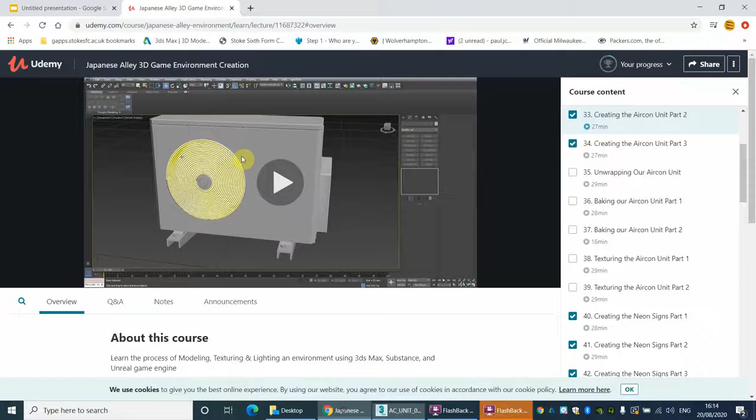Okay, so we're now going to work on this. We're going to make a circular, kind of spiral grill over the top rather than the square one here. I think it'll look better.

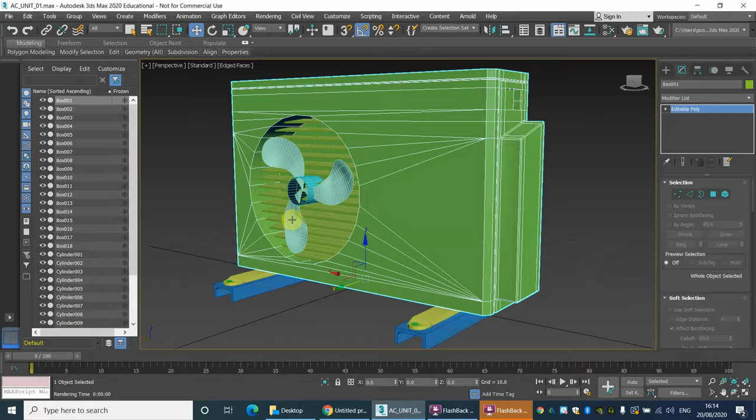Okay, so at the moment I'm just looking at where the blades are. They're quite tight to the end here, so I think I could move the grill, the blades, and the center column backwards slightly.

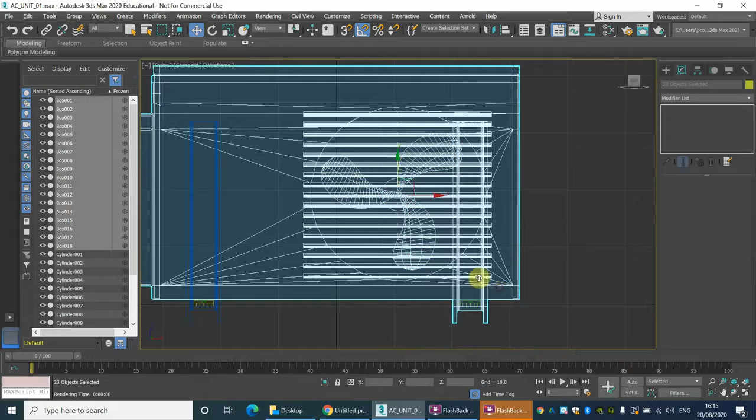So what I'm going to do is, yours might not be as bad as mine, but if it is, you can select, and then with the Alt key just select the parts you don't need, and then we can move those back.

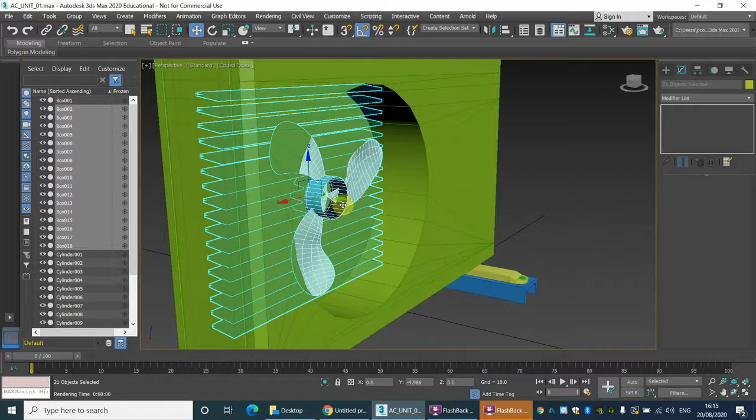Let's have a look at the perspective view so we're not losing any. They were quite far out before, they were like this, so we just want to go inside, something like that, just so you've got a little bit of space. Let's move them out a bit more, just a touch. Now we've got some space for the grill.

Okay, so I'm just going to quickly save that.

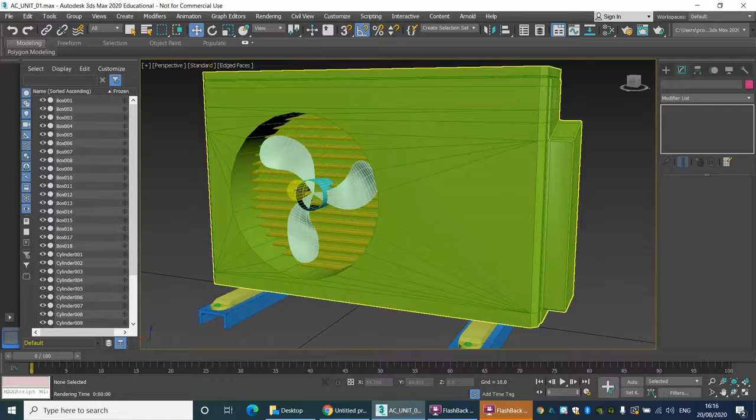So if you're using your Alt key to rotate and you can't really focus on the object, the best thing to do is click on the actual object itself, and then when you rotate it you've got full focus on that area. Okay, so let's have a little look at this grill.

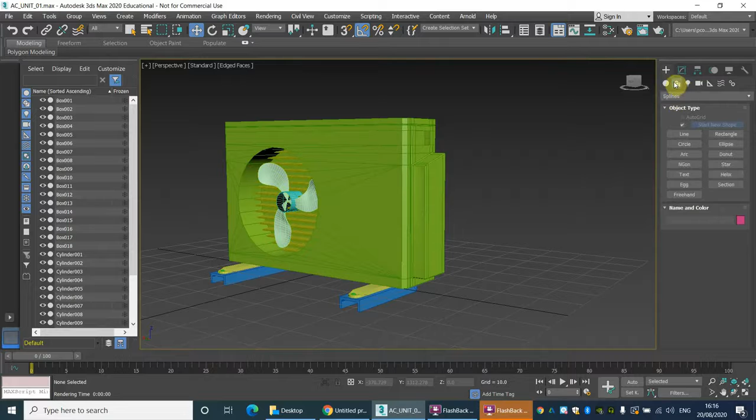So what I'm going to do is create a helix. So we need to go into shapes, splines, and a helix. Now this can be quite tricky to get right, so we'll just have a little go at this.

So I'm going to go out first, and then down, and then across like that. So it's three kind of drags.

Okay, so what I'm going to do now is rotate this 90 degrees so I can see what I'm doing, and place it next to my front view here. So if you've got this icon clicked here, if it isn't selected, select it.

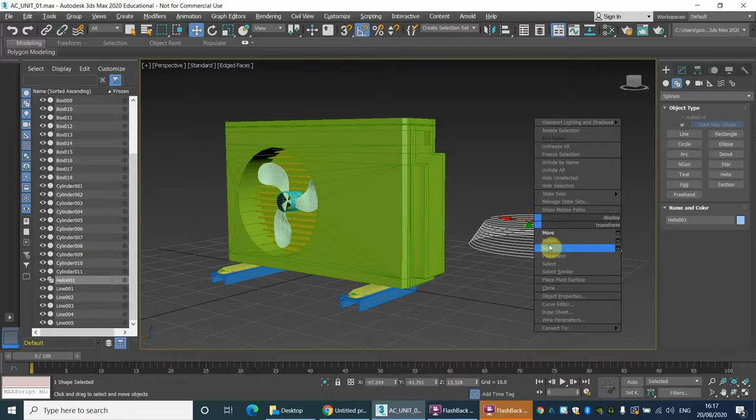If you're ever going to rotate anything 90 degrees, 180, 360, use this angle snap toggle. Then when you rotate an object and hold down your shift key, it will snap to 90 for you. Otherwise you'll be trying to do it manually and it's very tricky.

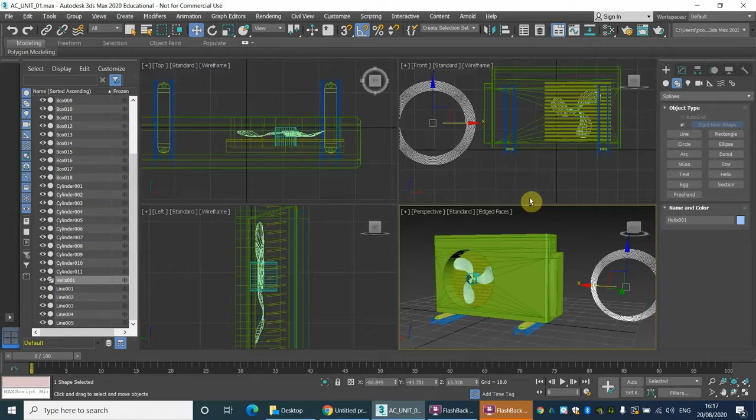Did that move slightly? Let's have another go at that. Let's say 90. Okay, and then I'll go back to move. I'll move it out so we can see it next to. So at the moment you can see it's far too big.

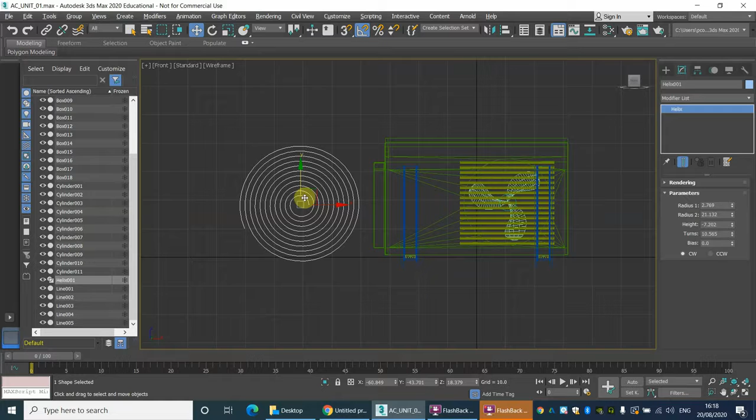So what I'm going to do is, if we go to modify, we can then with the helix do something like this. So with the radius, what you want to do is leave the center section like it is here, just so we can move it around the center section you've got here.

Okay, so we'll do that. So let's go back into the helix. Radius 2, you might need to go back to your perspective view to see this. So radius 2 would be, let's see, we don't want to go any higher than that. The height, it'll go in and out.

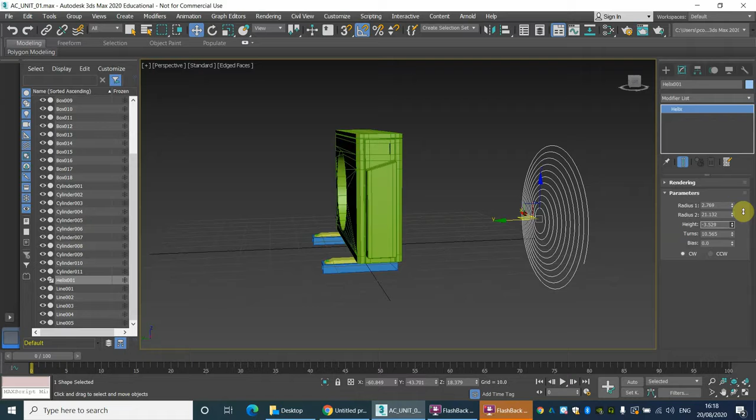So what we could do is, you want to give it a little bit of a convex shape, because you want it to kind of bow slightly there.

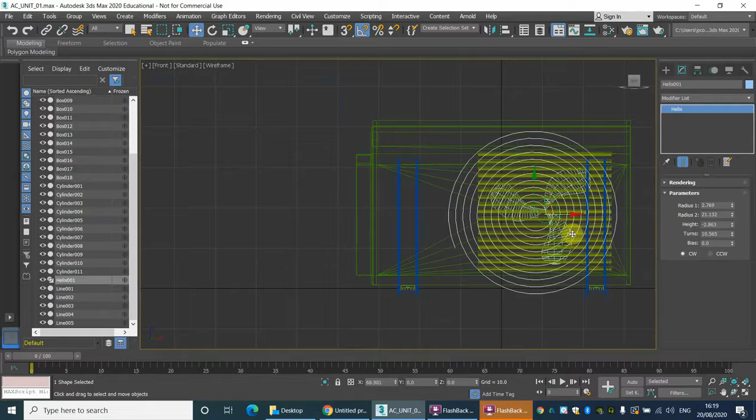So what we'll do now is move it into the area where we're looking at. So obviously you can see that this needs to be reduced somewhat.

Okay, so we need to try and get it in the middle if we can. You can use your center section there to try and position it as best you can around the area itself.

Okay, and then what we can do now is add some more, we can add some turns to it. So we can do some extra turns.

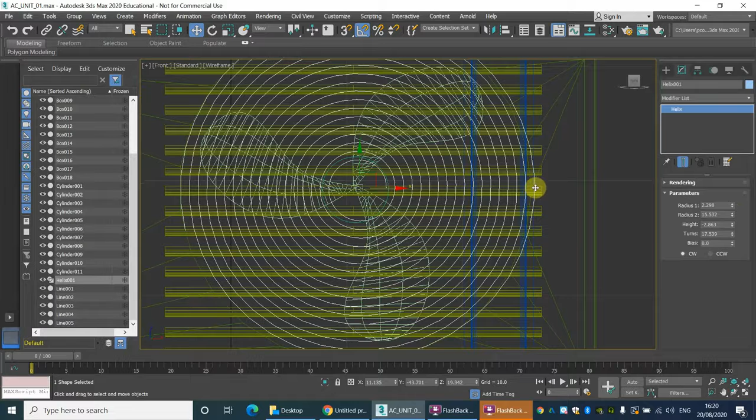We can adjust it, so I'm trying to get this here at the same width or the same area as the outside. You can see this one here is slightly out, so let's just try and get that as best we can in the middle.

And then I'm just going to reduce the first radius, as I say, just like that. So it's very similar to the center temporary column we put in earlier on.

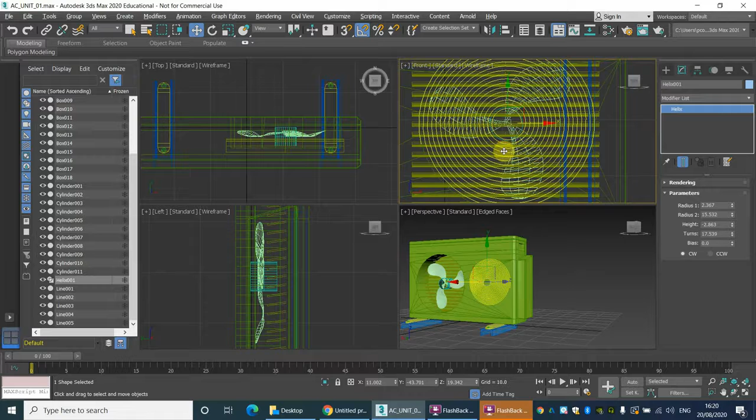Okay, let's just have a look at that now. And... lost it.

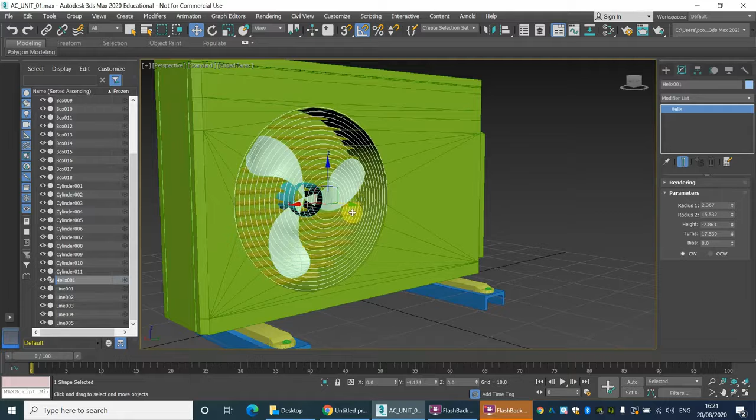Okay, here we go. Okay, so we're getting somewhere. That's not too bad at all. Yeah, that's all right. That's okay.

Now, what I forgot to do is, if we have a look, you can't really see it there, but I want to add a little frame around here. I kind of should have done that first, but not to worry. I'll click on this. We'll leave the helix there for the minute, and we'll come back to that.

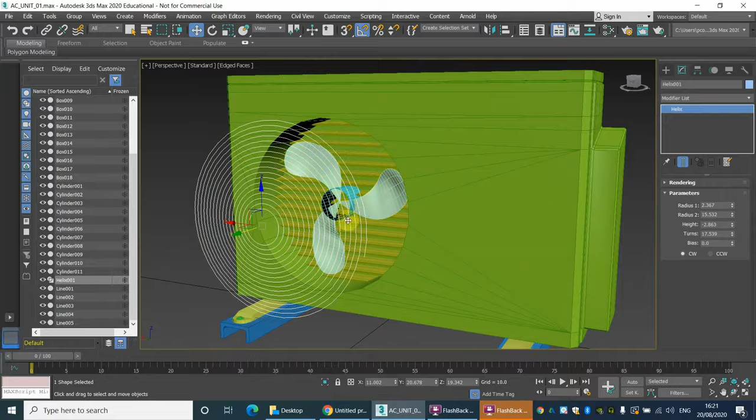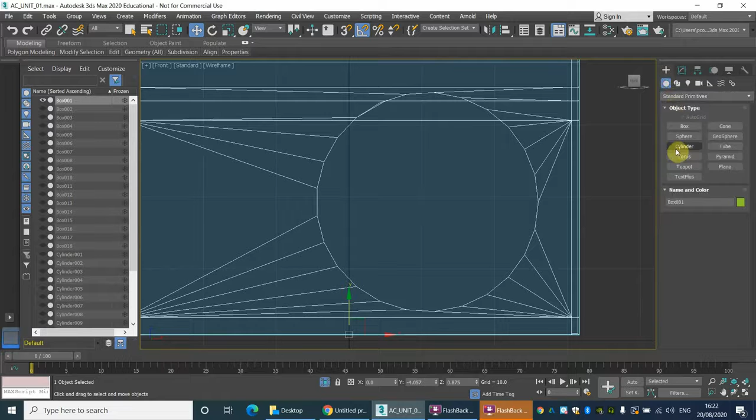Now we've got our shape, radius, size, and turns. We're happy with that. Let's go to the main unit and isolate that. So I'm going to go back to my front view here, create a cylinder from standard primitives, and again, we want to get it as close to this as we can.

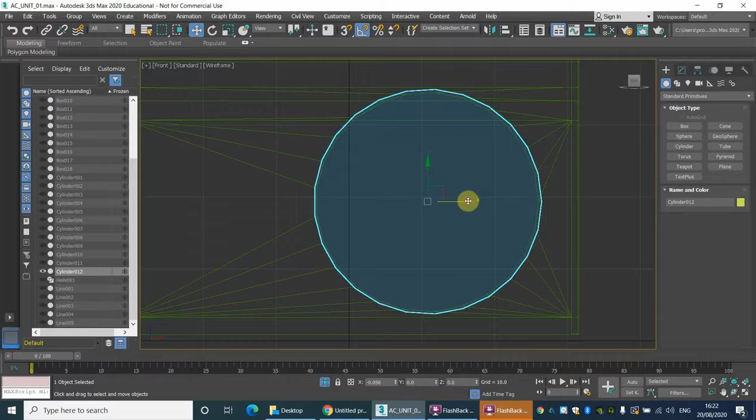Let's just get that so it's matching. A little bit further out though, because obviously we want to create the frame. Let's have a look at this. Move that out. Let's go to modify. Let's just move that back a little bit like so.

Tell you what I'll do, I'll just scale it up a touch and reduce it down later on. Okay, so...

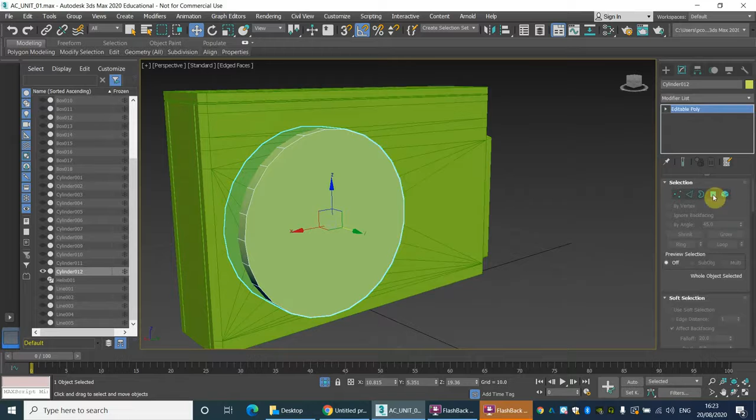What I want to do now is convert this to an editable poly, go onto my faces, and I'm going to click on... what am I going to do here? Let's click on the back face, delete that for a start.

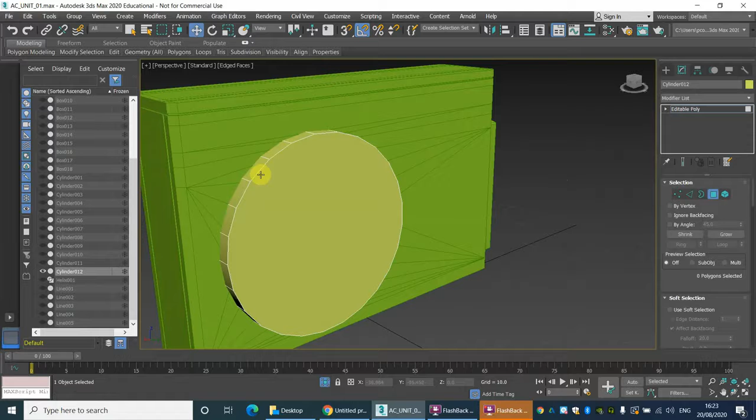And let's go to my pie menu. If you hold your shift key down, select faces... should let you, there we go, you only want, there we go, the faces. So it's a bit tricky, hold down the shift key until it goes kind of reddish, and that saves you clicking on them all individually. You can just select the ones you want.

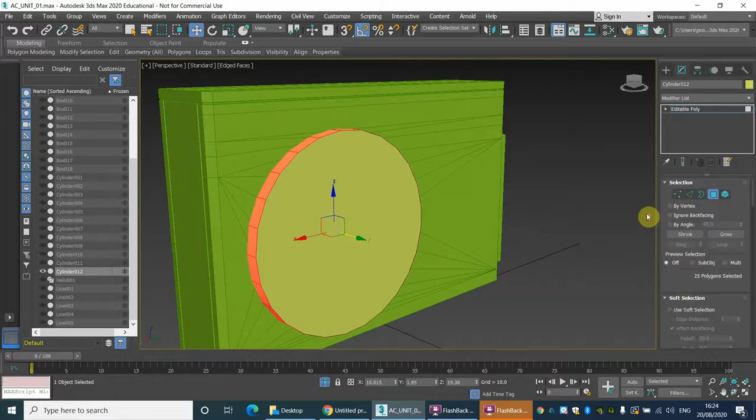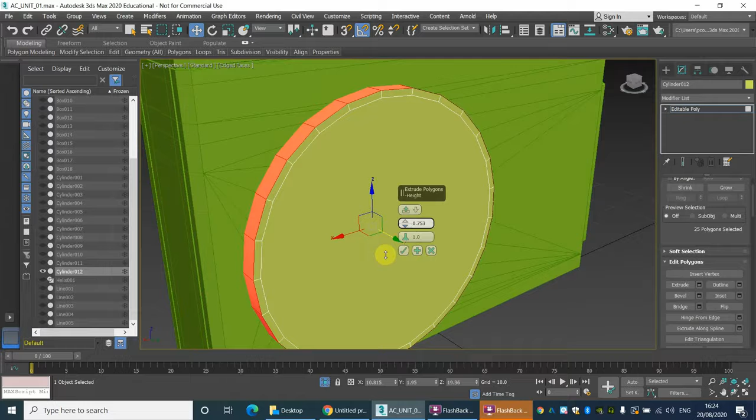Okay, so let's try now, and oh, what's that? Let's try now, and let's give it an extrude, and we'll go to local normal, and we want to just come in slightly. As I say, we can edit this afterwards. So we're just trying to create some extra geometry here for the frame. Okay, I'm quite happy with that.

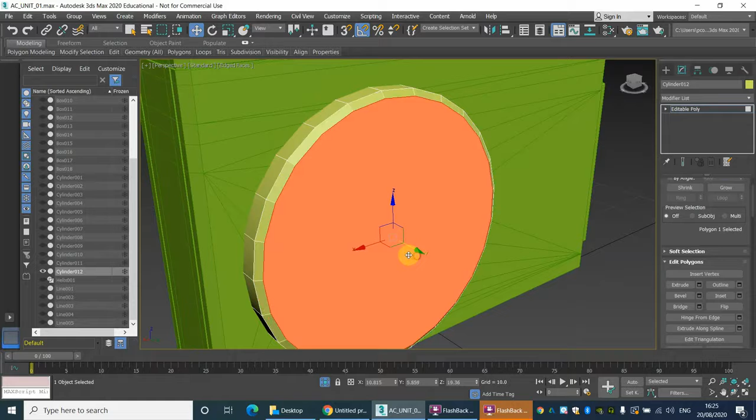And then if I click on that, I can then move that. Oh, what I should have done was extrude that. What I tried to do then was move it back, but obviously it's attached to those. So let's extrude that, and we want to go backwards. Okay, so it's at the back there. It goes behind. Okay. Right. Okay.

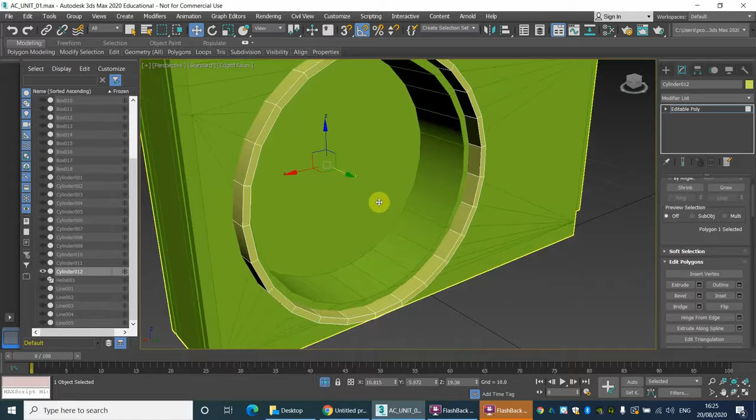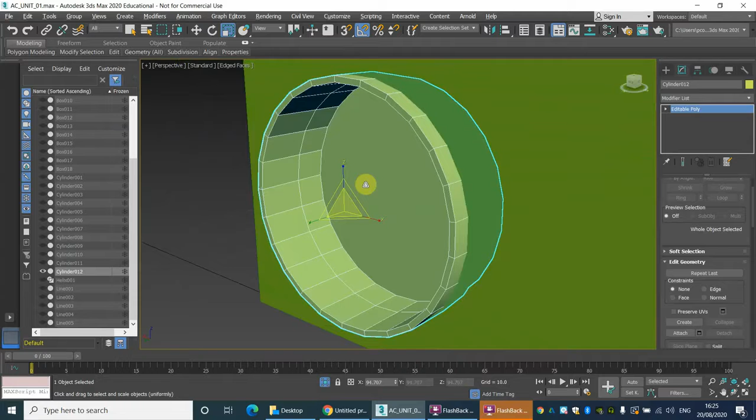So what we can do now is, if we click on the poly itself, we can then just scale this down so we are working like so. Okay, and then we can move it back so it forms a kind of a rim for us here.

Okay, now what I'm going to do is try and chamfer these edges here to try and make them a bit rounder. So if we go to... let's try border select. Again, hold down the shift key. Let's try edge seam. There we go, holding down the shift key.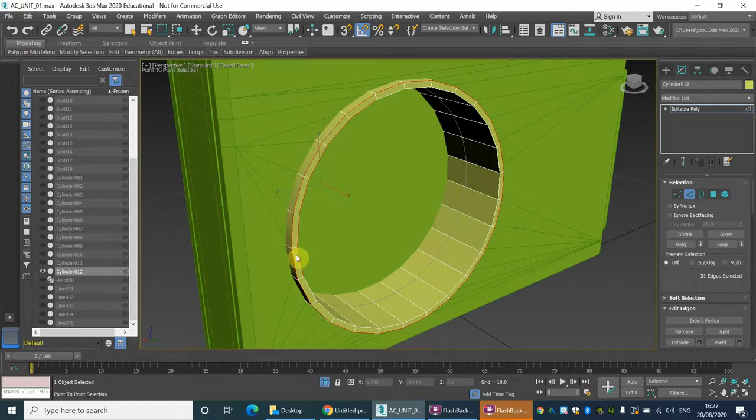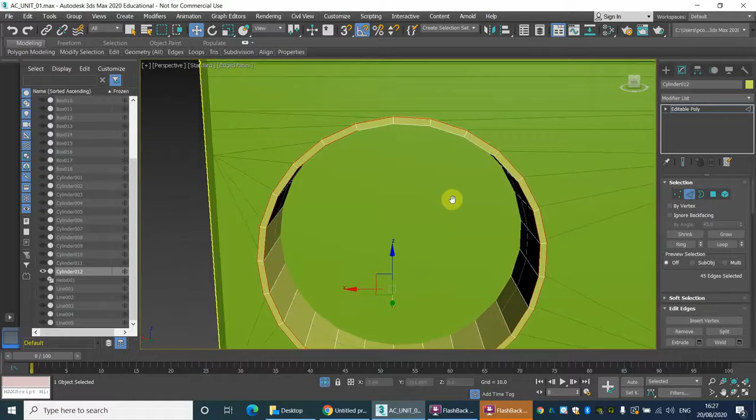Okay, so maybe I'll have to do these individually. Okay, just making sure I've got the edges. So control to add. Maybe get to that one. Okay, I think that's them all done. So then we're going to go to a little chamfer, and we're going to... it's a little tricky.

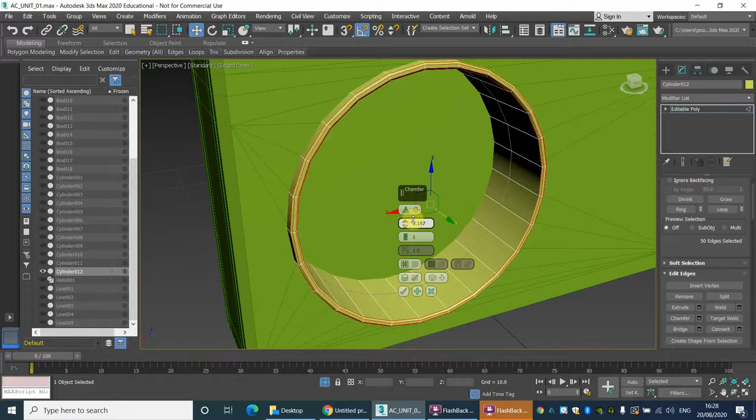Something like that, that's not too bad. It's quite rounded. Okay, and then we'll hit OK. And then if you wanted to, you could move it back.

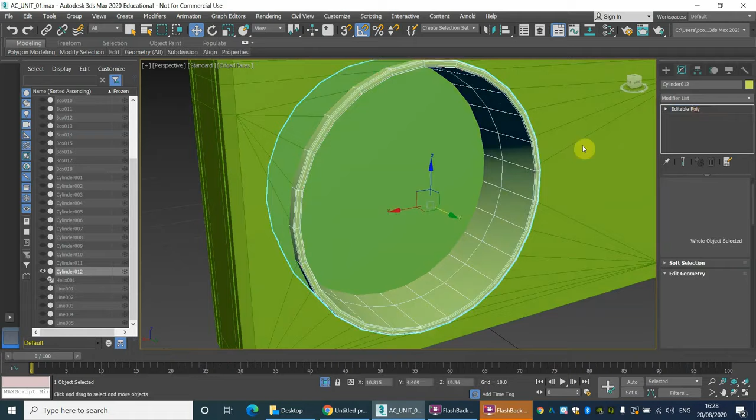So we've got now, if we take off the isolation, let's see if I can isolate two of those. There we go, we've got that. So let's just click on this a minute, and let's isolate that.

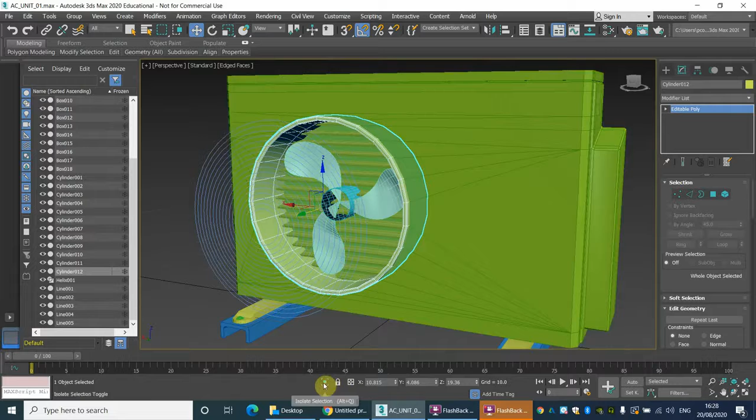Okay, so we've got something like this. So what I want to do is see if we can add a turbo smooth to this. Let's see what it does. Okay, it makes it kind of a bowly shape there. That's not quite what we want.

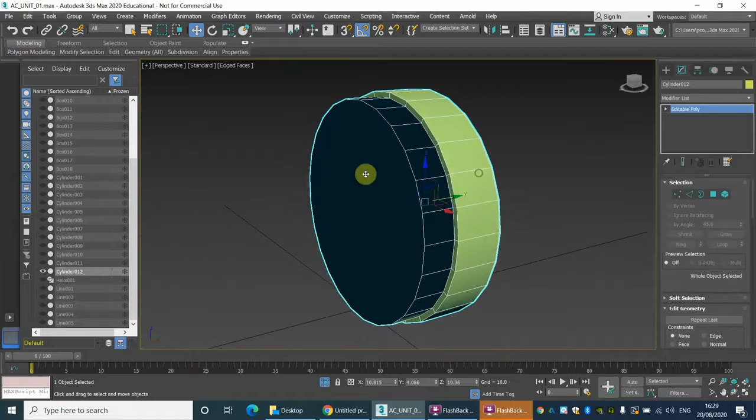So let's just delete that. Let's delete the back. And then let's put a swift loop. Come on. Don't know why this is being such a pain.

Now what I want to do is add one there, one there. Let's add one inside there, and put one here.

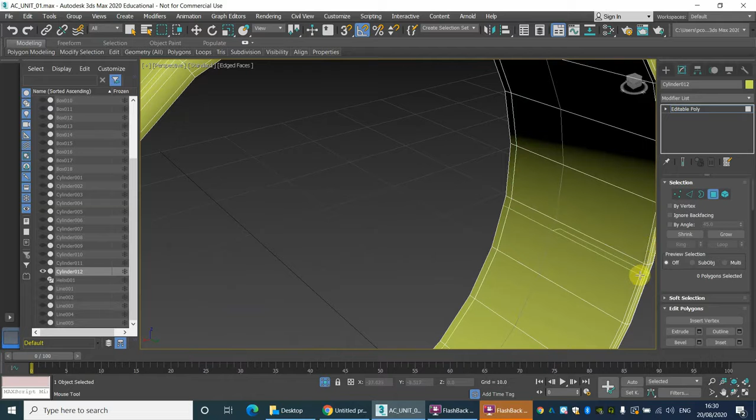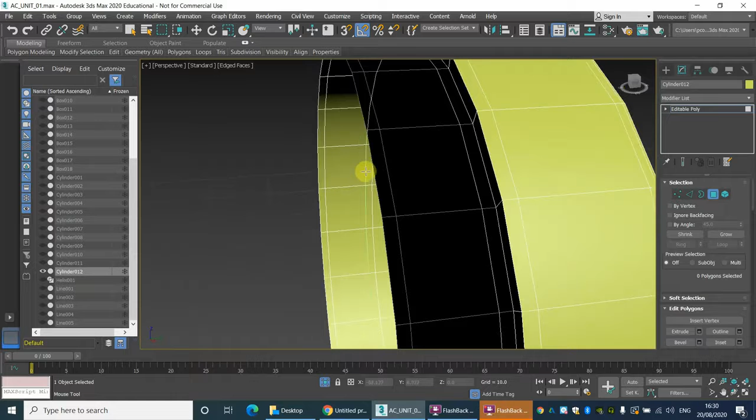The reason we're doing this is we're adding geometry to it. Before, what it was doing was folding it too smooth because it had nothing to work with, so it was taking the geometry and making it far too smooth because there was no additional geometry added into it, like we did with the blades for the air conditioning unit.

Let's put one there for the air conditioning unit. Okay, it's tricky. There we go.

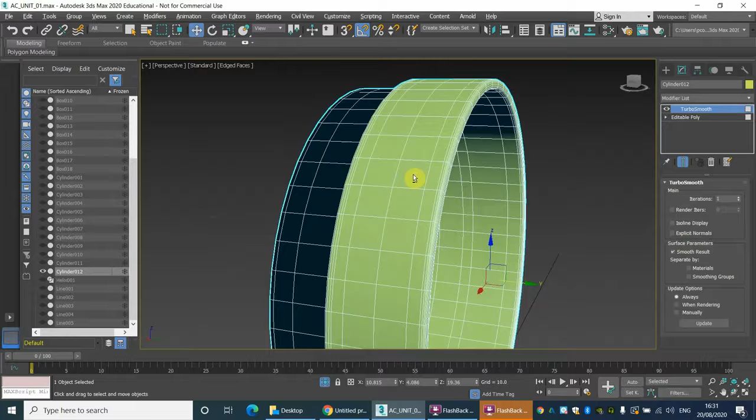Let's just see if this works now with the turbo smooth. That's better now, because obviously, since we added more swift loops into this, as the turbo smooth takes effect, it takes on board the extra geometry. Otherwise it'll just guess if it's not modeled correctly.

And that's quite high poly now. Just a quick little render of that, and that's quite a nice little drum. So I'm quite happy with that. So let's just de-isolate everything, and there you go. It's nice now.

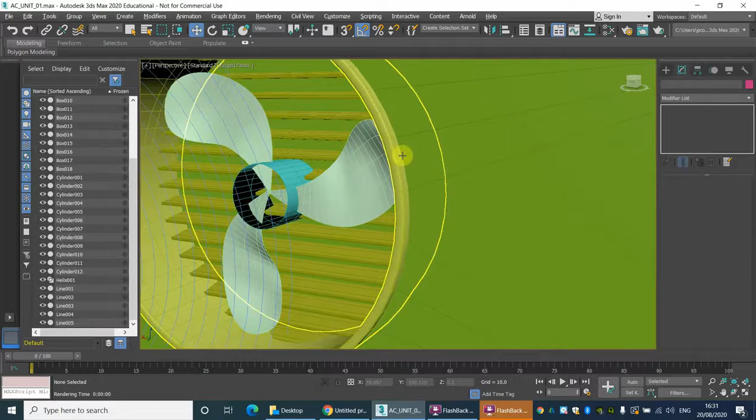So just a reminder, if you are going to add a turbo smooth, you do need to add additional geometry into it, so it knows the parameters of where to smooth and where not to. If you don't add geometry, it'll just do it for you, and it won't be as accurate as you want it, as you've just seen.

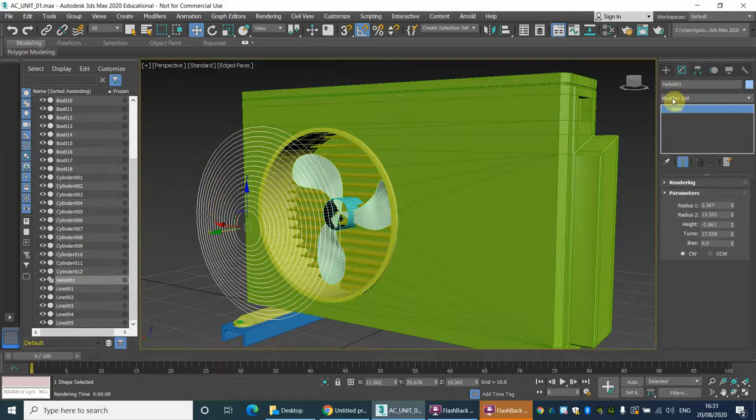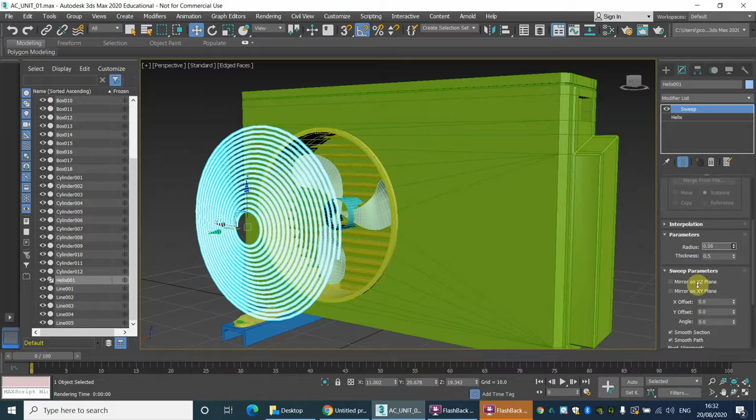So now we've got this, we can now add a swift loop, sorry, sweep modifier, and we want to have a... what do we want? We don't want a tree. Pipe - okay, we'll go for the pipe one. And we will then just reduce the geometry down like so.

Okay, so we can see we've got the helix there. Let's knock that up a little bit more.

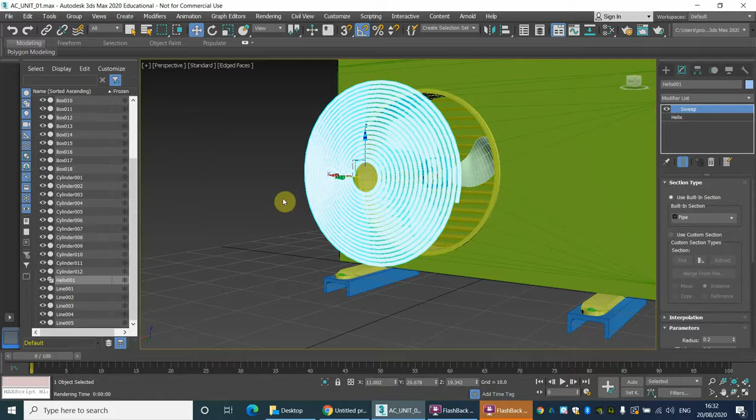Okay, we can do that a bit more. I think let's try 0.2. And then what we'll do is we'll move that back into position.

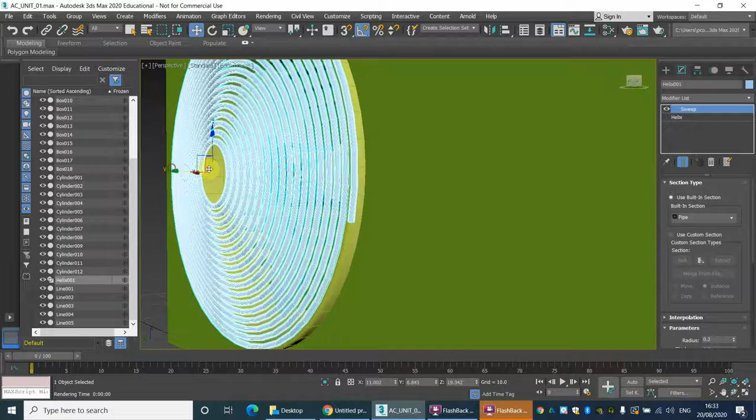Now again, you've got this element here, which is a bit of a pain. So we could either reduce this down, so that's not too bad. It's still okay.

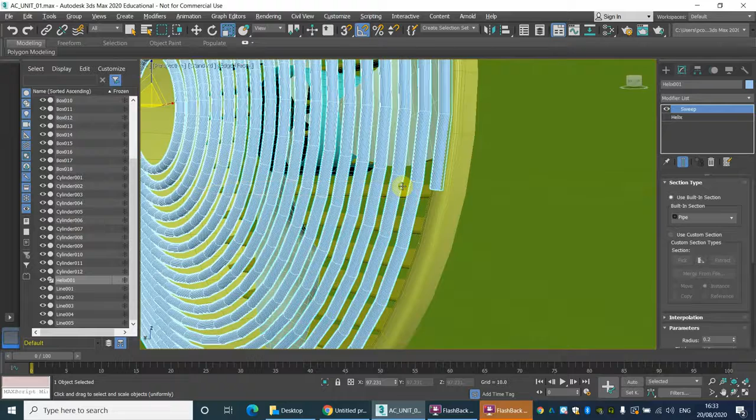Okay, so we've got this little bit here. What can we do here? What can we do here? Now, what we could do is we could kind of leave it like that.

Or if we go to the helix, or if we turn off the swift loop, sorry, and go to our... oh, what have I done here? What I'm after, so I want to go to the helix.

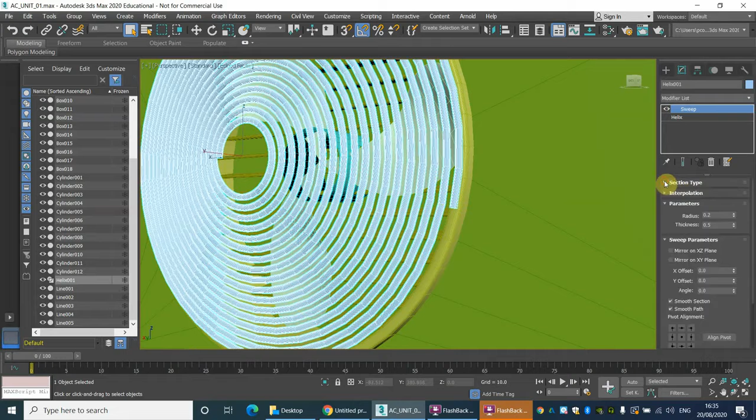And I want to be able to click on these points here. So I'll tell you what I'll do. I will adjust the interpolation. Trying to get hold of the...

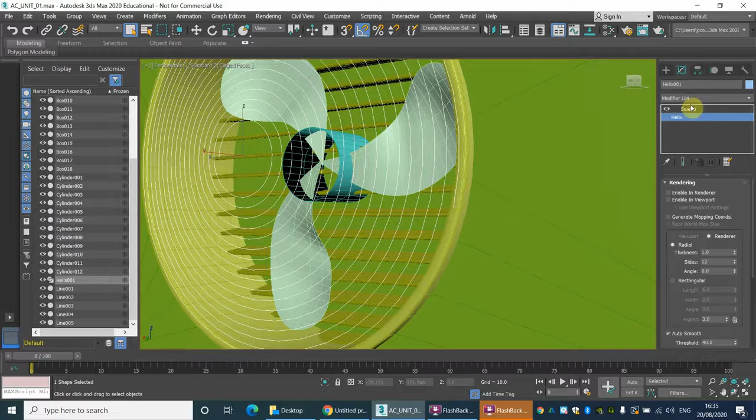Okay, so let's collapse that. And if we go into the vertices, maybe I can grab those and just move them in slightly, just so it's contacting into the frame itself.

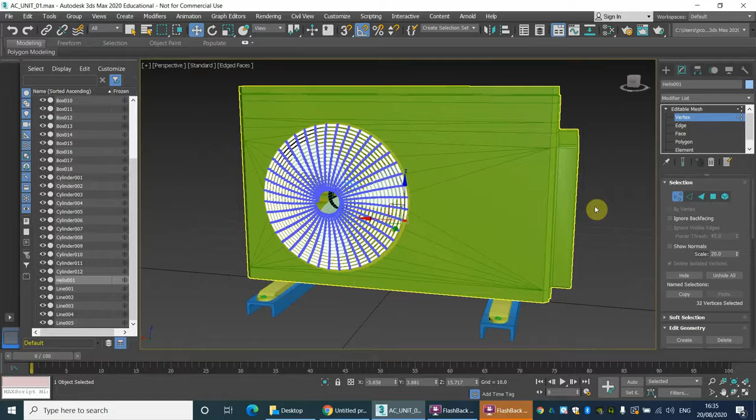Editable mesh, and then we've got something like that. Okay, so you can see it's coming together nicely. You've done the frame around the outside just to give it a bit more detail here, and you've worked on the helix, which is kind of like the grill for the actual unit itself.

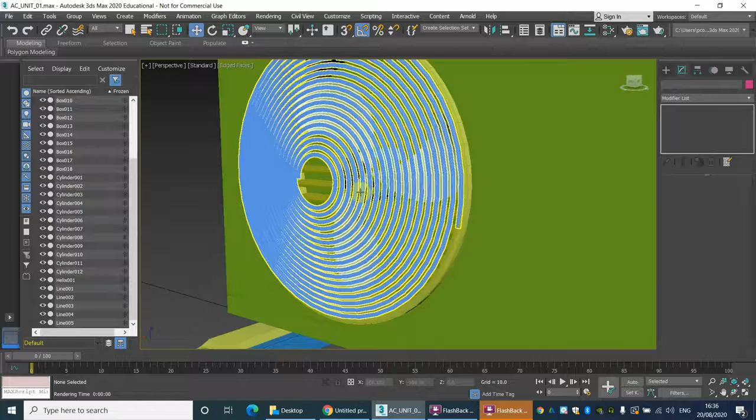Okay, so we'll leave it there for that tutorial. The next tutorial we'll work on the center section here. We'll pull it out, we'll do some extrudes and some bevels just to cap it off so it's holding everything together. Okay, so there we go. I'll save that.